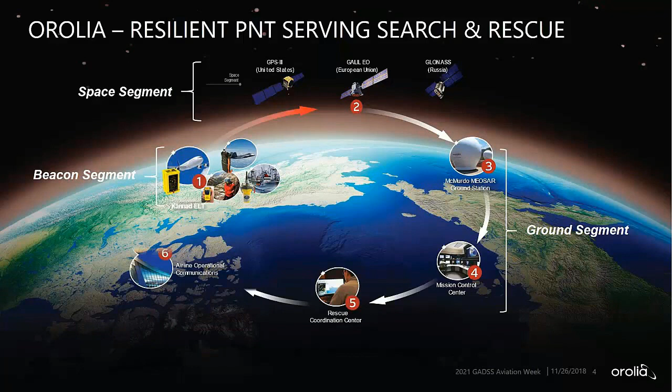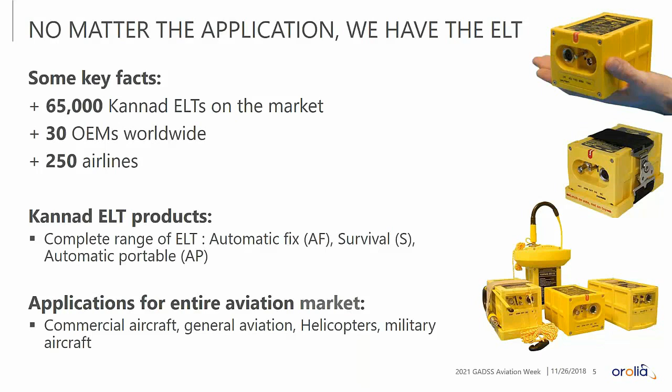While Orolia is quite a name in the aviation industry, its Kannad brand has been providing emergency locator transmitters, ELTs, on the marketplace since 1995. Indeed, Kannad is supplying around 30 OEMs worldwide and more than 250 airlines. The company developed a complete range of ELTs, including automatic fixed, portable, also called survival ELTs, enabling installation on all types of aircraft, from experimental light platforms, ultralights, to wide-body commercial aircraft, as well as helicopters. More than 65,000 Kannad ELTs have been installed on all types of aircraft so far.

Now let's start the second part of our presentation and talk about GADSS, standing for Global Aeronautical Distress and Safety System. In this part, I will explain the scope and the purpose of GADSS, as well as the key deadlines associated with this new regulation. As you know, over the last few years, several accidents happened where downed aircraft could not be located in a reasonable time, or even not located at all, involving long and expensive search efforts.

Shortly after the MH370 disappearance, a special multidisciplinary meeting on global flight tracking was launched by ICAO to propose recommendations for future improvements. In 2015, one of the main decisions taken was the need for airline operators to track their aircraft on a more regular basis. This was the beginning of GADSS. GADSS goals are to increase the ability to locate an aircraft, rescuing survivors, then the wreckage and the flight data recorders. To achieve this intent, an effective and globally consistent approach to improving the alerting of search and rescue services is essential.

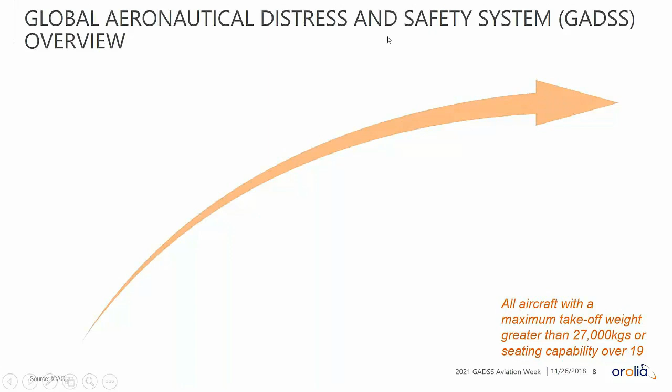The Global Aeronautical Distress and Safety System, GADSS, addresses a number of key improvements during 3 key phases of the flight. First of all, it is important to mention that aeroplanes concerned by the GADSS regulation are aircraft with a takeoff mass greater than 27 tons or with a seating capacity over 19. Let's talk about the 3 phases of the flight.

The aircraft tracking part of GADSS was mandated a few days ago on November 8, 2018. It refers to the tracking of an aircraft during normal operation and establishes the operator's responsibility to track its aircraft every 15 minutes. Most of the operators comply with this requirement through existing installations, such as ADS-B, for example. Today's objective is to focus on what is expected and how to comply with the upcoming mandates, which are the location of an aircraft in distress and post-flight localization and data recovery by January 2021.

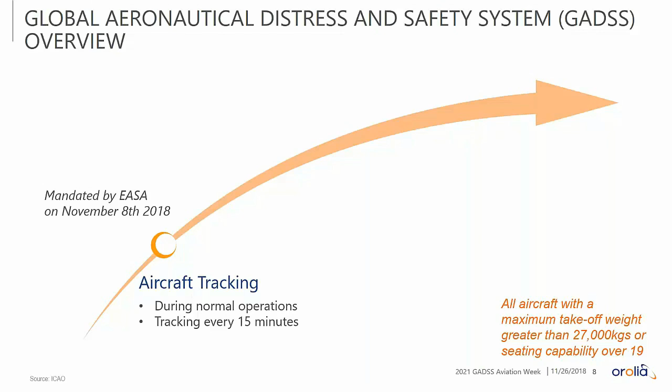Autonomous distress tracking is the obligation for operators to detect when one of their aircraft is in distress and track it until the end of flight. In distress, location of the aircraft is required at least every minute. We will see later that we propose a much higher frequency.

This is a performance-based requirement aiming at locating the aircraft within 6 nautical miles. What is also new is that the activation is triggered by the analysis of the flight parameters of the aircraft itself when still in flight. Aircraft status and location information must be shared with search and rescue authorities and the operators themselves.

The third part of GADSS is the post-flight localization and recovery. It concerns the end of flight when the aircraft is down, to be able to recover the flight data and cockpit voice recorder, to start the accident investigation as soon as possible, or as it is said in a timely manner in GADSS language. In this perspective, accurate aircraft position information of 1 nautical mile or better must be provided. For example, by means of the ELT homing signal guiding search and rescue services to the accident site.

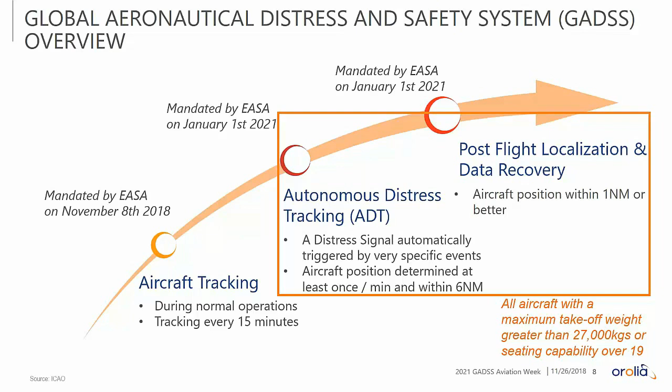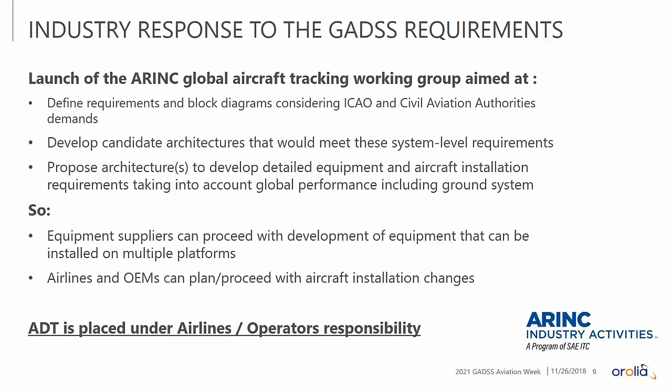Having those key recommendations in mind, let's now see how Orolia offers OEMs and operators to comply with those 2 upcoming mandates. New aircraft architectures meeting ICAO's recommendations had to be defined. This is the aim of the ARINC working group on global aircraft tracking. Orolia is an active contributor to the ARINC working group, and we are also in constant collaboration with aircraft manufacturers to align system architecture with the regulation. We have been defining a performance-based solution for an airborne equipment communicating with a proven ground infrastructure in emergency management and search and rescue, such as COSPAS-SARSAT.

In parallel to the working group participation, Orolia was selected by the European Commission back in 2015 to develop and market the first world solution compliant with the autonomous distress tracking segment of GADSS through a consortium called Helios. This project, led by Orolia, also includes key industry leaders in aircraft design and manufacturing, external antenna design, and aircraft modification, including the development of a GADSS-compliant STC for the A320 family. This STC includes Orolia Next Generation ELT-DT, DT for distress tracking, which is compliant with both autonomous distress tracking and post-flight localization and recovery from GADSS.

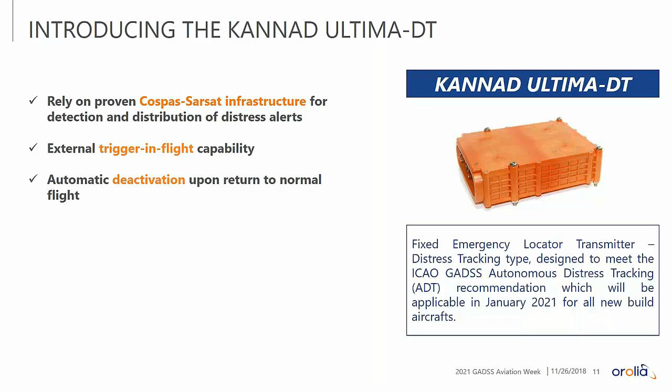This ELT, called Ultima DT, communicating with the proven COSPAS-SARSAT infrastructure for detection and distribution of distress alerts to the relevant SAR authorities, communicates with operators at the same time. The Ultima DT comes with an external trigger-in-flight capability, which will enable the ELT to transmit a distress message after analysis of the flight parameters by the aircraft avionics itself. Moreover, should the flight return to normal operations, the ELT will deactivate automatically, preventing false alerts.

The autonomous distress tracking function is provided by the embedded GNSS, acquiring the aircraft location permanently. As a redundancy, the unit will also be connected to the aircraft GNSS through the ARINC 429 bus. In order to comply with the post-flight localization segment of GADSS, we have conceived a robust design, making the unit post-crash resistant. The Ultima DT will be transmitting on the 121.5 MHz homing frequency to guide SAR operators in their final approach to the accident site.

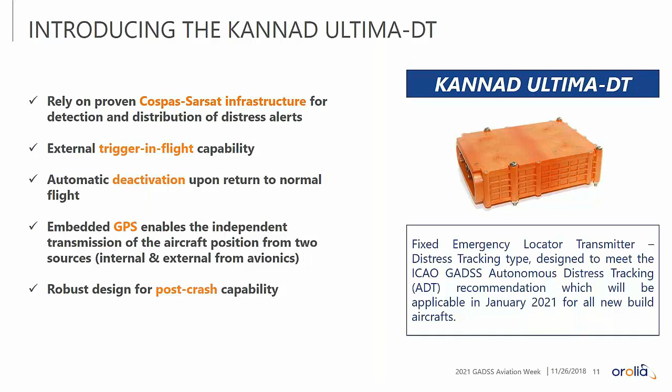Before I leave the floor to Pablo, I would like to show you in one simple table how Orolia's ELT-DT meets the performances required by ICAO on both autonomous distress tracking and post-flight localization and recovery aspects. On the left part of this table, you will see the capabilities expected by ICAO, starting with the activation means. This must be either automatic, based on flight parameters from the aircraft avionics, as well as manual from the crew. Those activation modes are met by the Ultima DT, as we saw in the previous slides.

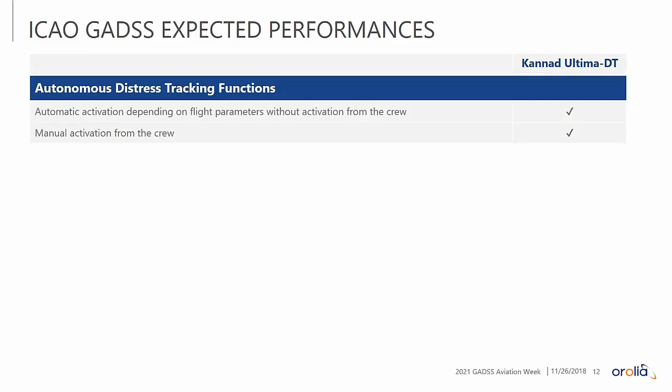In addition to that, the aircraft position should be initiated no later than 5 seconds after the detection of the distress conditions, and then refreshed every minute. The Ultima DT will exceed this requirement by transmitting after 5 seconds and refreshing aircraft position every 5 seconds during the first 30 seconds, then every 30 seconds during the autonomous distress tracking phase. As mentioned, its internal battery will ensure the ELT, when activated, can work independently from any other aircraft system, and does not use any power budget that can be necessary to other equipment in a critical distress phase of the flight.

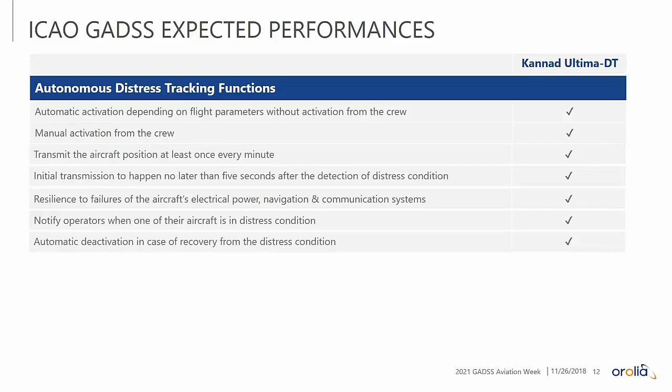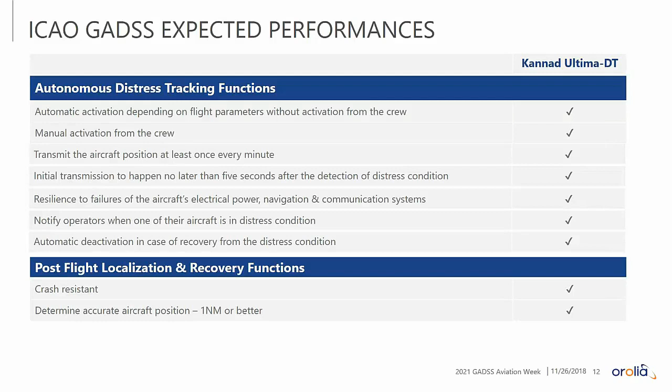Operators will be notified of a distress through the COSPAS-SARSAT ground infrastructure and the Rescue Coordination Center. In any case, the automatic deactivation feature will prevent the unit from sending false alerts in case the aircraft has managed to recover from a distress situation. Finally, the Ultima DT meets the post-flight localization and recovery functions through its crash-resistant design, which includes the 121.5 homing signal used to guide search and rescue teams and provides the very high location accuracy required as part of the mandate. I will now ask Pablo Pintado to present the STC of the Ultima DT on A320.

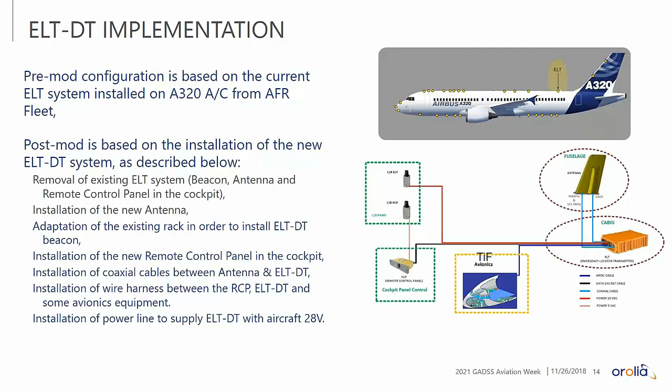So regarding the ELT-DT certification, AFI KLM E&M is developing a supplemental type certificate for the A320 family aircraft to retrofit the GADSS compliant Orolia ELT-DT as part of the European Commission Helios project. Air France DOA will create and design a specific Air France service bulletin to describe the technical implementation of this ELT-DT system and to provide all the technical instructions to perform this installation.

Certification tests, which will be performed during the prototype working party, will allow EASA to certify the modification regarding the measurements and the results of the certification tests. Once granted, this ELT-DT STC could be adapted to any A320 aircraft of any fleet in the world. So we hope to have a lot of possibilities to implement this new ELT-DT on other A320s.

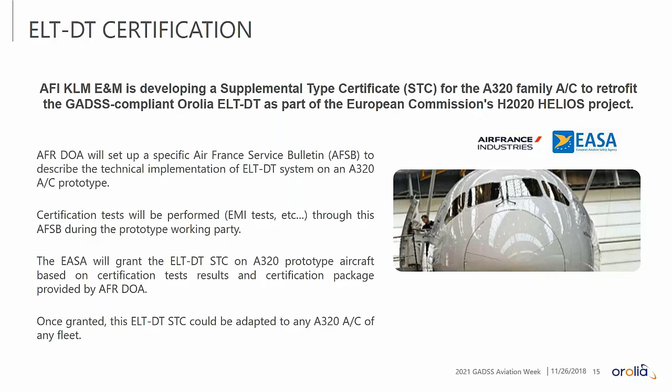You mentioned that the ELT had an internal battery. Is it a lithium battery? And if yes, is it compliant with the requirement on special conditions? Thank you for your question. To answer the first part of the question, yes, the internal battery of the Kannad Ultima DT uses lithium technology. However, we do comply with the FAA's requirements on non-rechargeable lithium batteries. As a proof of compliance to this regulation, the ELT meets two key standards. Firstly, the DO-227A, which are the minimum operational performance standards for non-rechargeable lithium batteries. And secondly, the ELT will be certified according to the new TSO C126C.

All right, thank you. Our next question. Could you please detail the activation means of the ELT compared to a traditional ELT? Thank you. Yes, the current automatic fixed ELTs activate automatically upon impact through an internal G switch and can also be manually activated through the remote control panel installed in the cockpit. The new ELT-DT will be automatically activated by the aircraft avionics when still in flight and can also be activated manually with a control panel as we see today.